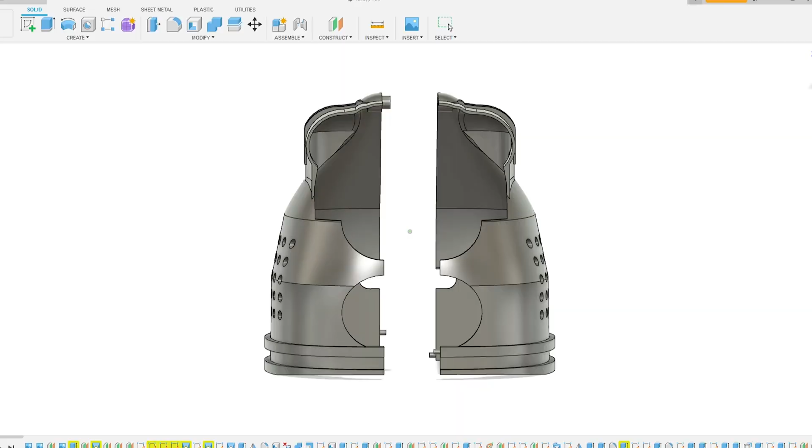Today I'm going to show you how it went from this to this to eventually this, and how you can do the exact same with absolutely any object. So I'm guessing you're stuck in the same situation as me. You want to recreate something cool, but you can't quite find the exact part on the internet, or anything remotely close for that matter. So now you're left with no other option but to build one completely from scratch.

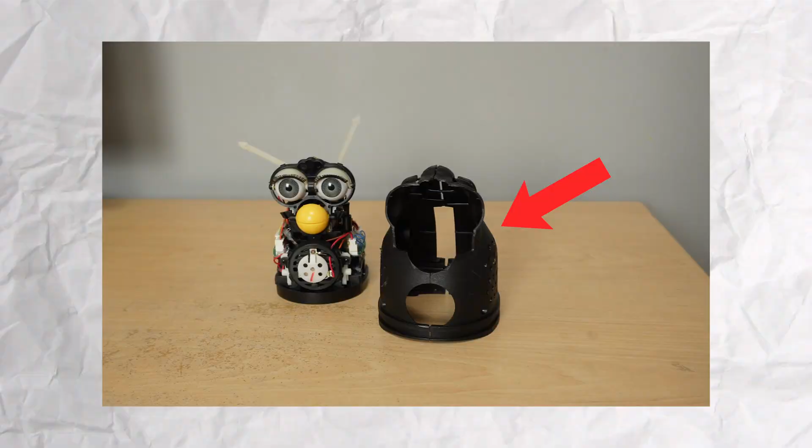So the goal is to redesign this Furby exoskeleton in Fusion 360 and make the process as easy as pie. Okay, first things first, let's take a look at the overall structure of the Furby exoskeleton by abstracting away all the details. Okay, so we can see it's a very irregular shape with lots of bumps and curves all over the place. So defining the entire silhouette as one shape will not do the job. Instead, we're gonna have to split up every distinct layer and loft in between the gaps to find the best fit shape. Okay, so now we have a basic idea to create the general shape of the exoskeleton.

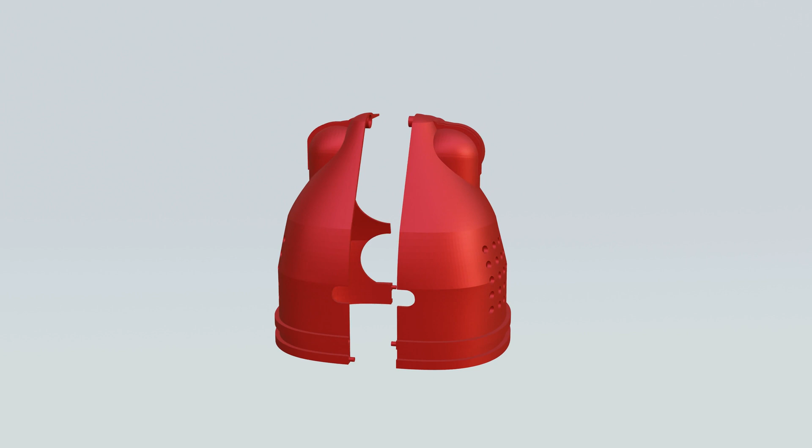Now let's bring back some of those details. Perfect. So now we can see our Furby model has some holes and is also shelled out on the inside completely. So now we have a list of pseudo steps, if you will, which can be mapped to real world actions within Fusion 360. Now all we have to do is make our steps look a little cleaner, and boom! We have a step-by-step guide on making a Furby exoskeleton, or whatever you want to make.

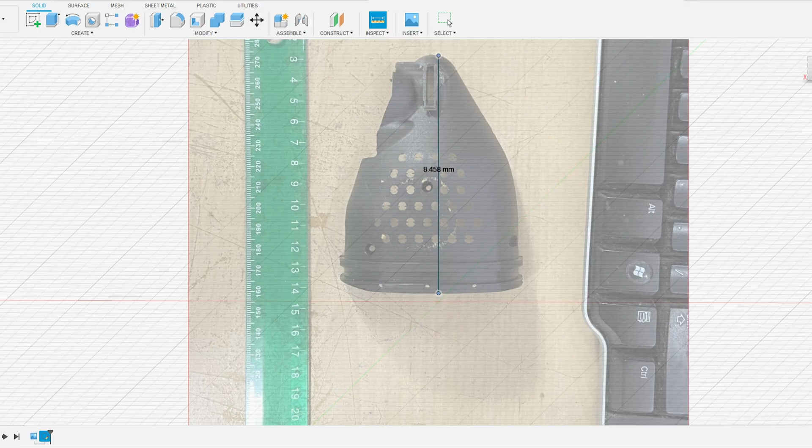The first and foremost step in reverse engineering something like this would definitely be reference images. In this case, I'll need 4 to cover all my angles: a top, a side, a bottom, and of course, a front. Nice, now all we have to do is drag and drop our reference images and scale them to the right size. By the way, I used a ruler to get the best dimensional accuracy. And boom! Our reference images are done.

Cool, next we're gonna make the main body of our Furby exoskeleton. As I mentioned before, we're gonna do this by slicing up the different layers of our Furby model via our newly created reference images, and then lofting those layers together to create the main body of our Furby exoskeleton. Notice that I only sketched one half of the Furby model. I did this so that I only need to model one half of the Furby. The other half can just be mirrored.

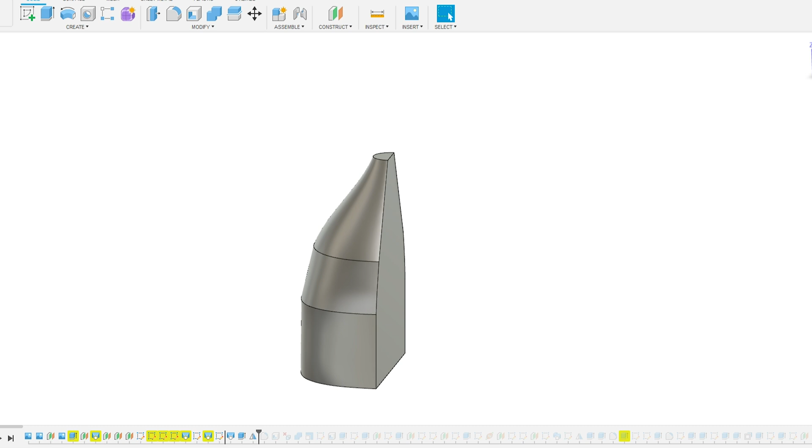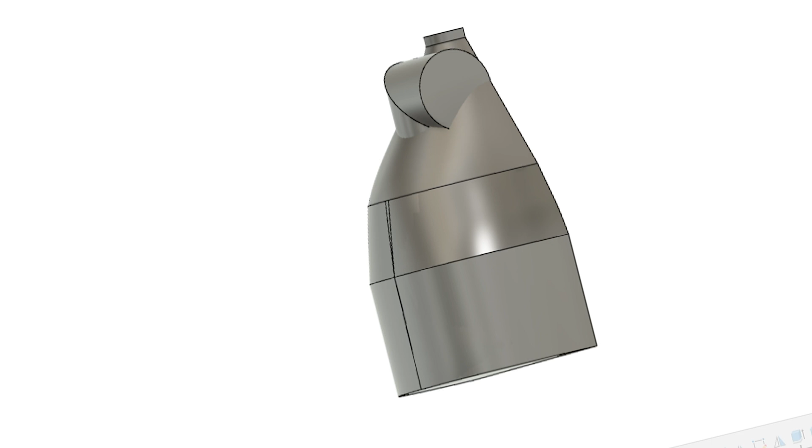Oh yeah, one more thing. If your object's dimensions veer slightly away from the reference images, that is completely fine, as perspective distortion is a real thing, and capturing a perfectly orthographic image is highly unlikely. I then added the eye by using the good old pipe tool, and there we have it, half a Furby. Sorta. We can then go ahead and mirror our model and see that things are really starting to come together. Nice! So we have the first half of our design completed, and now it's time to add those details back to reach our final product.

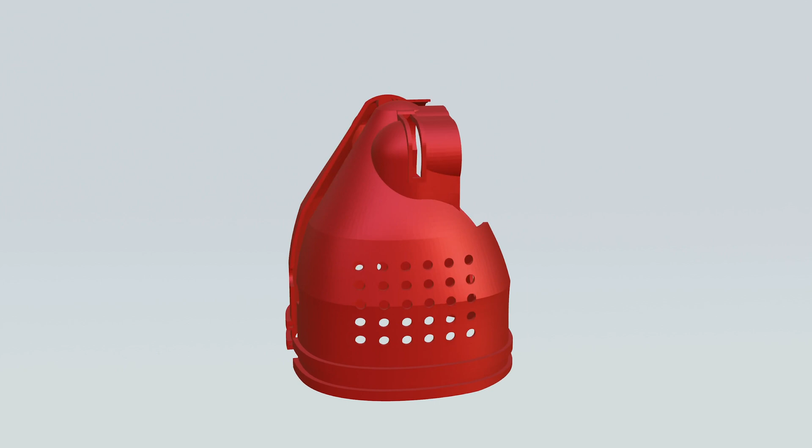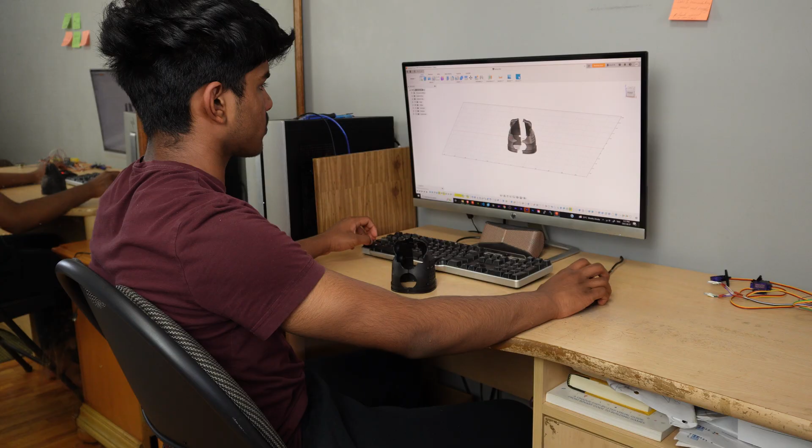Firstly, I'm going to shell out the inside of the Furby to make it hollow. Next, I'm going to sketch and extrude the face holes. Perfect. Next, I'm going to add some aesthetic details, like these snap fit parts, this USB port, this speaker hole, and finally, these cheese grater looking thermal vents. Perfect. Our Furby model's looking nice and good. All that's left is to slice and print, and bam, our Furby exoskeleton is complete. But wait, it's a little too small. Okay, back to modeling. I'm just gonna...

Now, this might have actually been a blessing in disguise, as now I can print the updated Furby model in this colorful PETG, which is far more heat resistant than the current Furby model printed in PLA, which will just slowly smush as the electronics inside start to heat up. Ow! So now it was all a matter of...

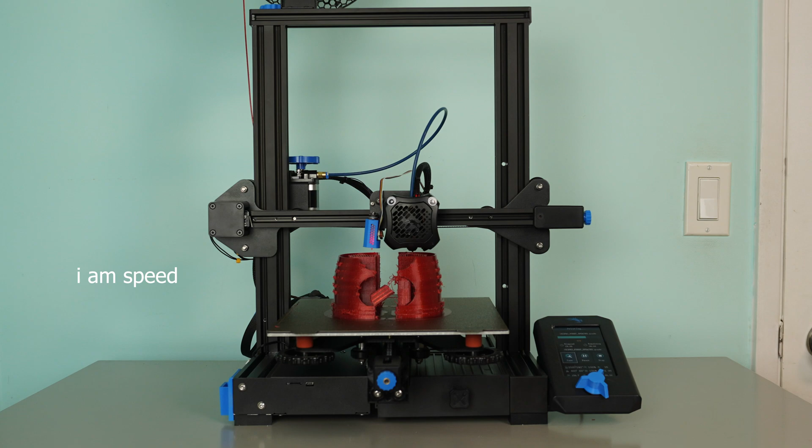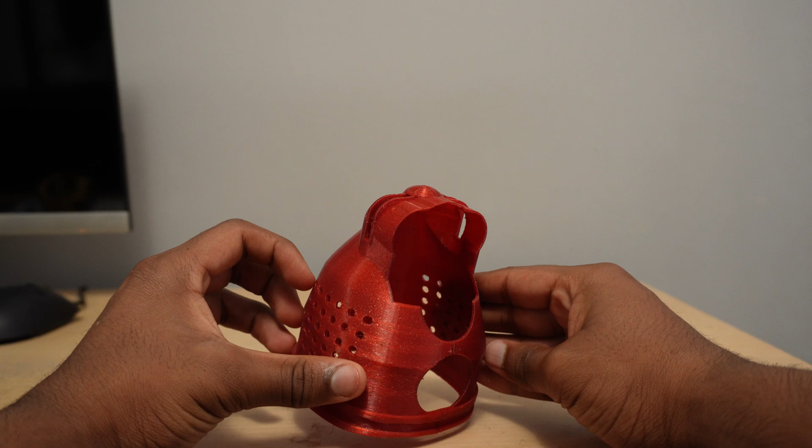So this is a final Furby exoskeleton, modeled with pretty much perfect dimensional accuracy. And all we really did was generate a simple 3D model based off our original injection molded Furby silhouette, ignoring all types of details. And then after the general shape was achieved, refining our model by re-adding back the finer details, to reach our fully re-engineered Furby exoskeleton.

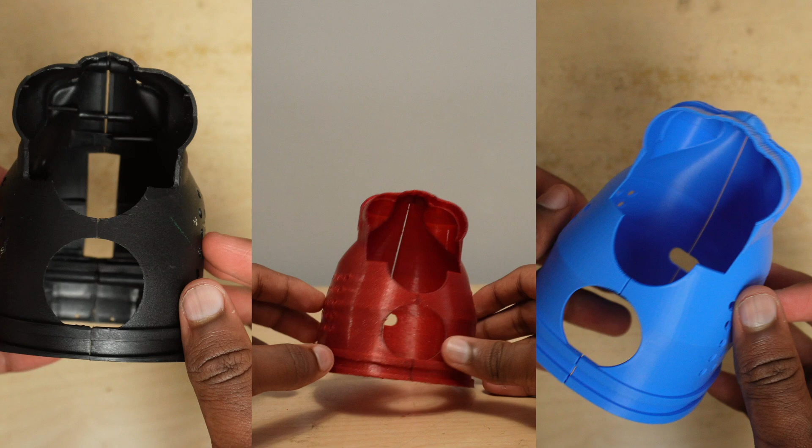And if we take a look at the original, we can indeed see that they very much resemble each other. We can even install our Furby guts and see that things fit nice and snugly. Throw on its skin, and you can barely tell that the entire exoskeleton's been 3D printed.